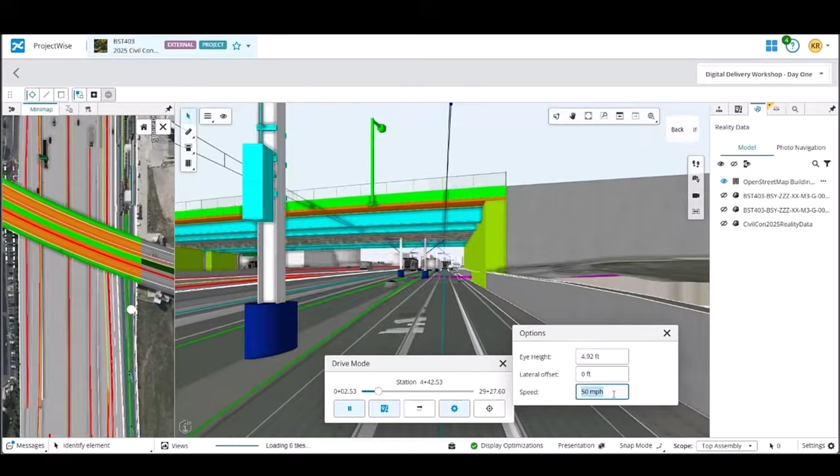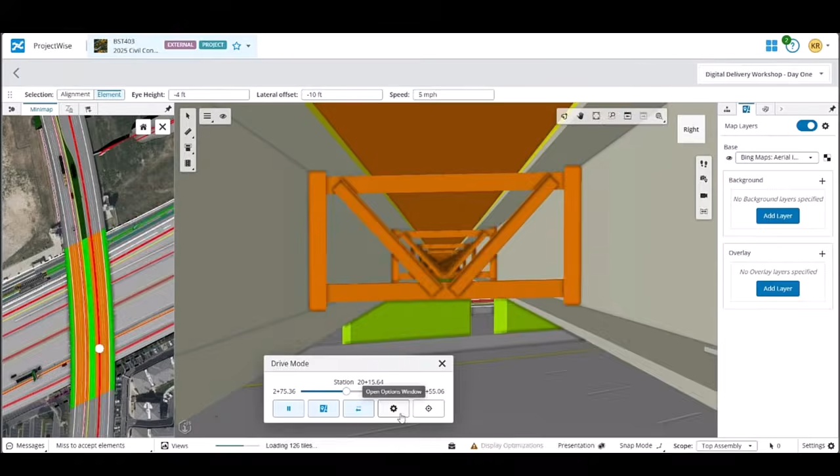So I want to give you just a little bit of a taste of that. This is a data set that was built here in Denver, right? So we're here in Denver, and what better place to be for a civil infrastructure conference? This is a city that's booming, it's growing. And so what you'll see here is they reconstructed essentially aspects of I-25, the Belleview rail station, and then Union Avenue. But look at the level of detail this model has. They put a lot of time into this, a lot of work into it for this workshop.

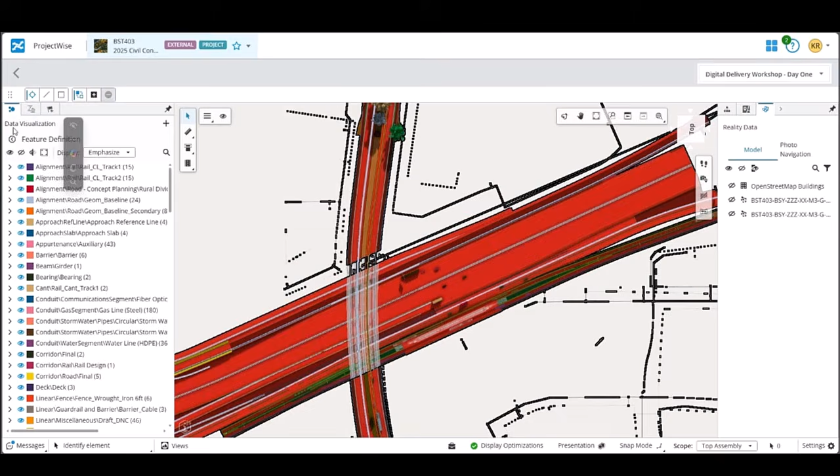So my name is Dustin Parkman, and over the last 20 plus years, I've done nothing but work in this industry across design, build, operate, and maintenance. And I've never been more excited about where the industry is than right now. We're finally starting to see this convergence of not only the market conditions, but also the technology coming together, allowing us to kind of do the things that we've been talking about for, it seems like, over a decade, which is sharing information, integrating data, and being able to leverage the great work and artifacts that you guys do every day throughout the life cycle of infrastructure.

So at Bentley, we refer to ourselves as the infrastructure engineering software company. It is all that we do. So there's no better place we'd rather be than right here with all of you for the next few days. When you think about civil infrastructure, we often think about it in terms of transportation, so roads and rail networks and a lot of the linear stuff that we specialize in. But the reality is what you do spans all of these different industries, and these are all the different industries that we participate in, particularly with civil infrastructure, across transportation, water, energy, mining, facilities, et cetera, et cetera. It all plays a vital role in what we do.

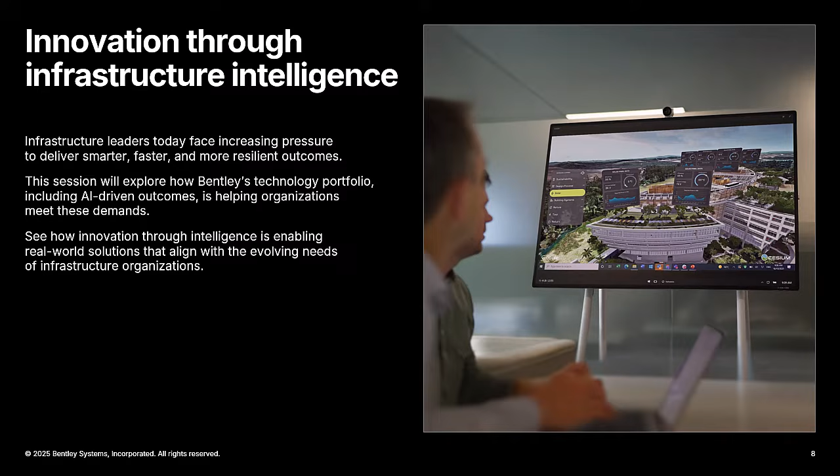So these are just some of the data sources, the usual suspects that you would find in any given project or any type of infrastructure organization, whether it's subsurface data, geospatial information, the wide array of design and simulation software that comes about, systems that are in the field for SCADA and IoT, as well as all the wide range of survey artifacts and enterprise data. But it's really hard to pull all this together and make it seamless and use the information across all these different stages.

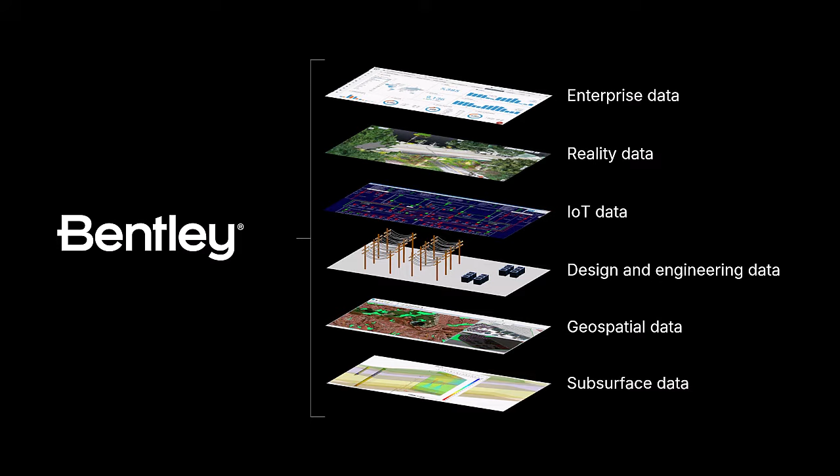So our approach to this problem is what we refer to as an infrastructure digital twin. The simple way to think of that is just a virtual replica of a physical thing. A lot of the work that people in this room do, you're creating those virtual representations of what's going to be built, what's going to be operated, what's going to be maintained. And so by leveraging that as a visual index to find information is really, really an important part of where the industry is going.

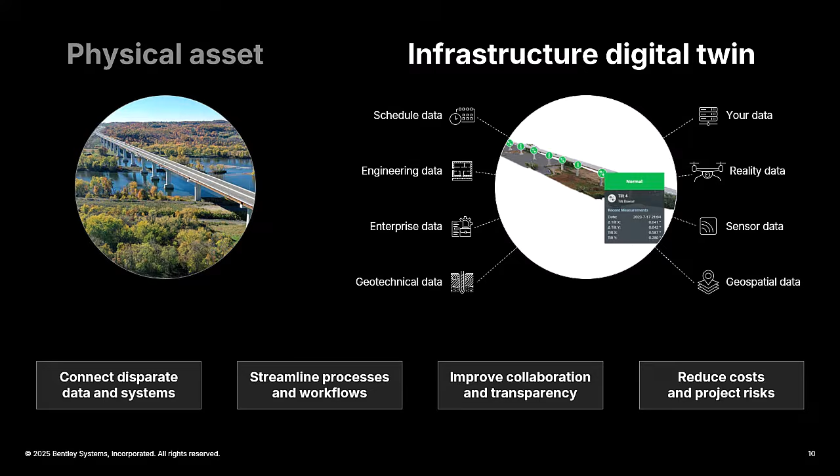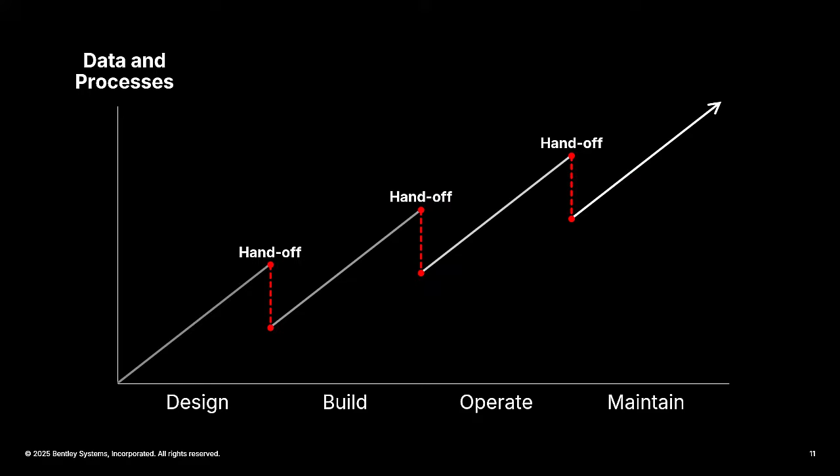Many of you have probably seen a diagram like this before, showing the information loss that takes place over design, build, operate, and maintain. There are these different stages where data is handed over, it's lost, and then you have to rebuild it. So what we're essentially trying to do is compress that.

We're not trying to solve it all, but we want the right information to be carried from design to build, to operate and maintain. For this room, what's really interesting is we're finally starting to see convergence where design and engineering data can be leveraged throughout all these stages. There are also commercial opportunities to leverage that intellectual property across the life cycle, allowing engineering firms and design agencies to create more value across the life cycle of infrastructure. I'm going to walk you through a simple example of that.

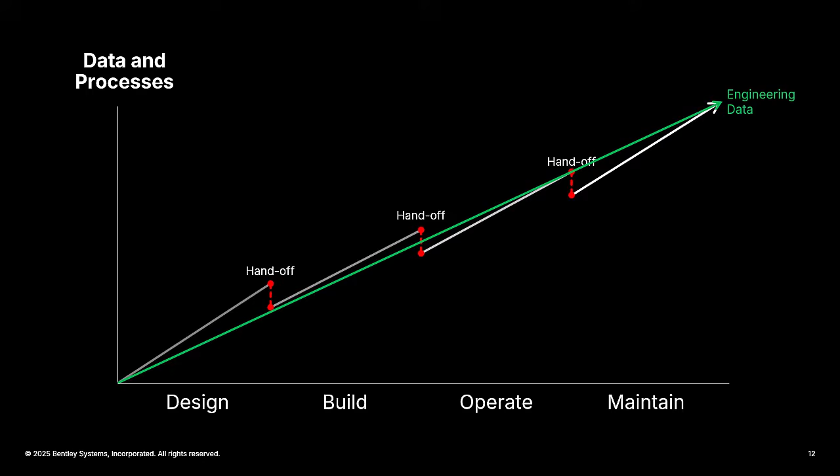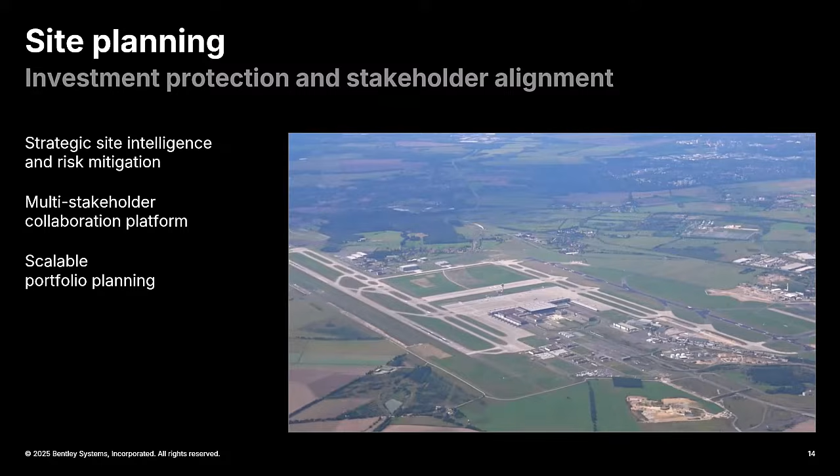From planning through design, through construction, and operation, what do we mean by leveraging a digital twin in the planning stage? At the beginning it could be about understanding the site conditions, maybe even site selection, if it was a new project.

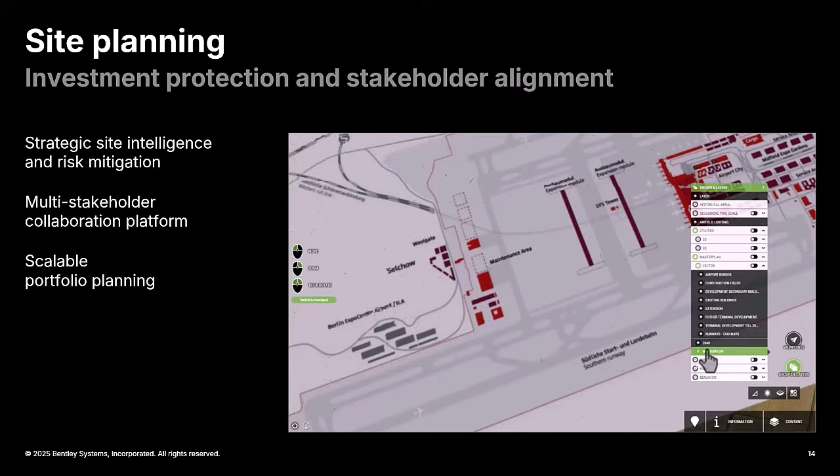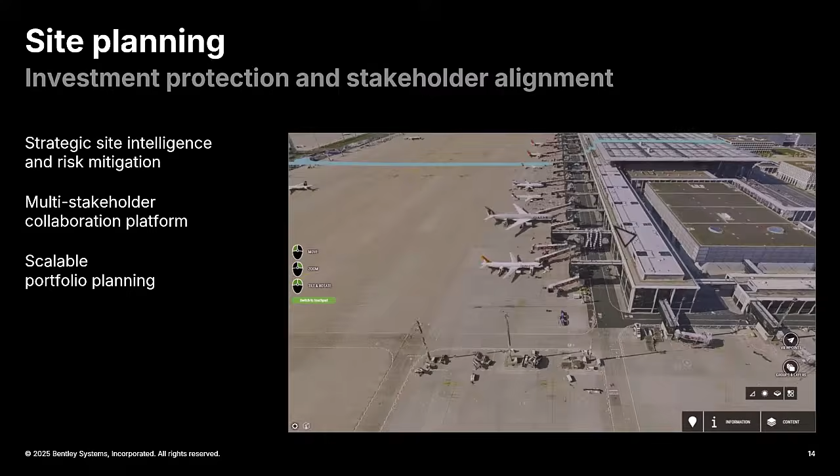In this case, I'm showing an existing airport facility, and we're starting to look at enhancing this airport, determining whether to build a new airport or expand the existing one. For the planners, this visual way of looking at the information is really powerful, not only to see the model, but to understand the utilities, the power, water conditions, and subsurface conditions, so you can get a true 360 picture of what you're getting yourself into from a capital allocation perspective.

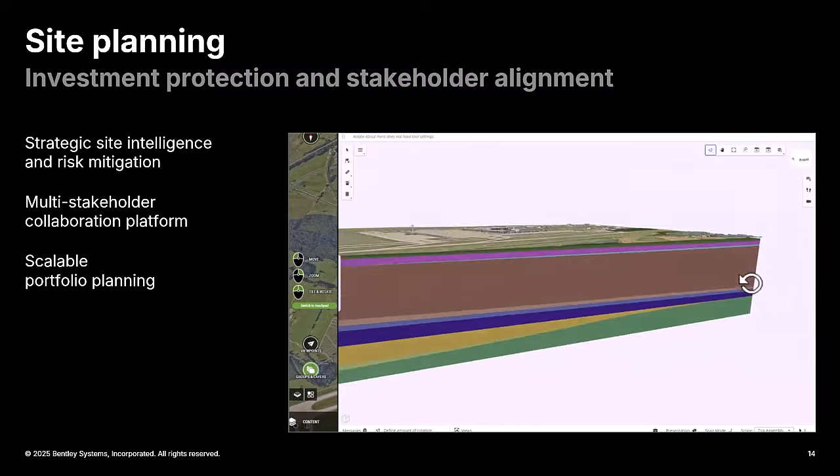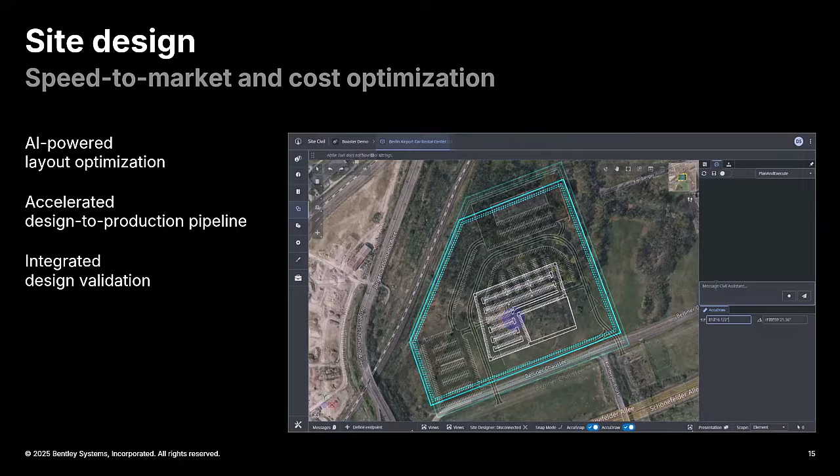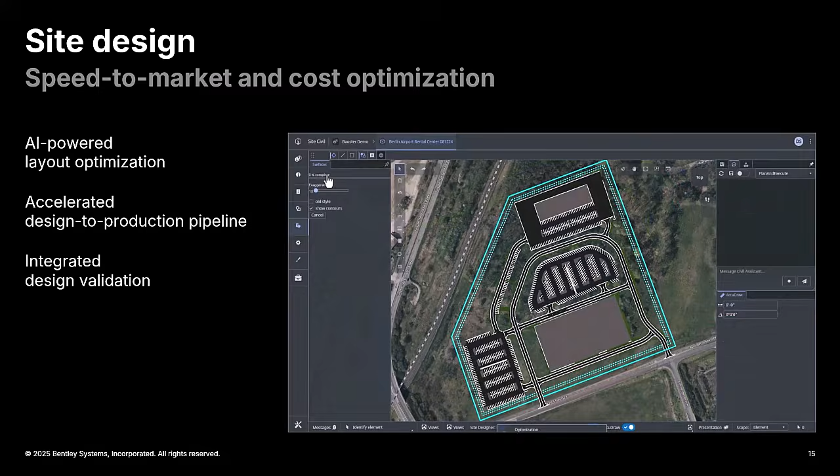Once you've figured out those options, you can explore them in conceptual or preliminary design. Here we're showing an example of leveraging AI to automate some of the sketching out of the conceptual design of a site. This gives you the ability to explore different design options, then bring those alternatives back into an environment where stakeholders who have to make decisions can interact with that information much more effectively.

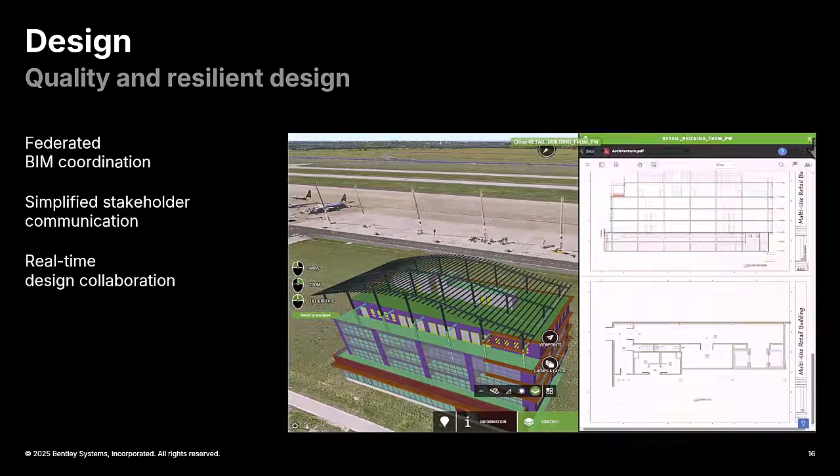Here we're looking at some office buildings on the site, along with terminal information that's going to be built for this particular airport. The digital twin allows you to interrogate that information and look at different conceptual options before you move into detailed design and before you move into construction.

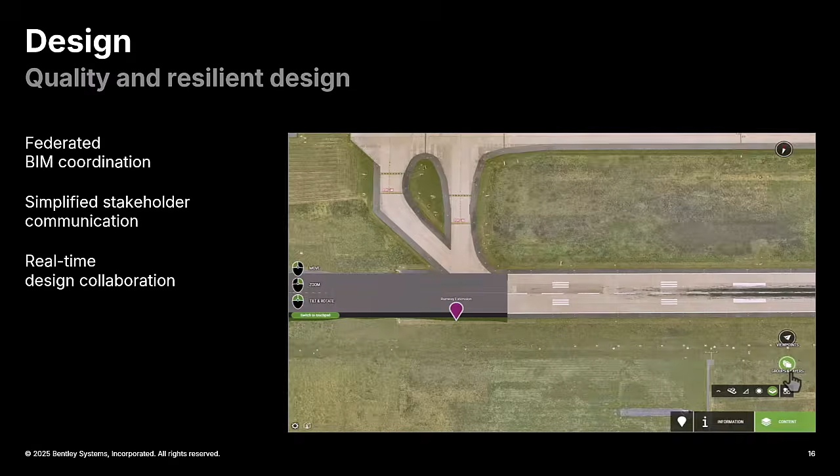Once you've made your site selection and done your detailed design, you want to simulate the construction of that piece of infrastructure. In this case, we have a facility we're constructing where we've taken the design and broken it down into its constructible parts using a schedule and a 4D model, then simulated how it's going to be built.

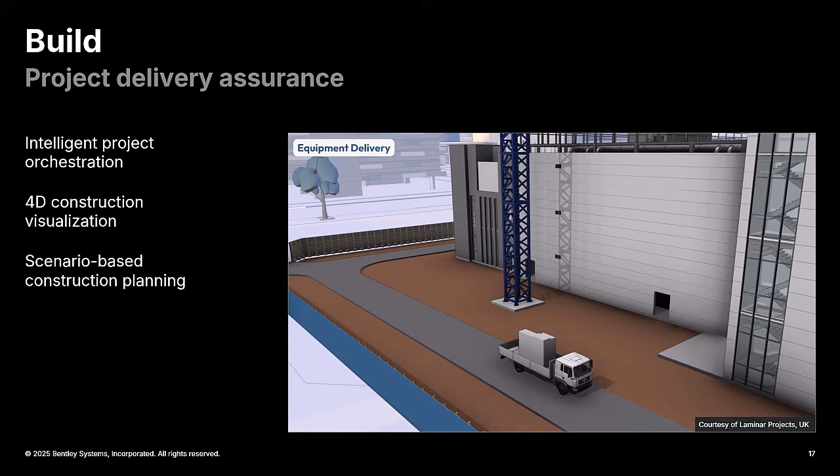This can be simulated at a conceptual level from a planning perspective, so you understand the risks, or it could be a detailed scenario where you're actually planning out the construction itself with a detailed work plan, P6 schedule, etc. This allows you to simulate the construction before it happens, understand your risks at much greater depth, and avoid construction liens and similar issues.

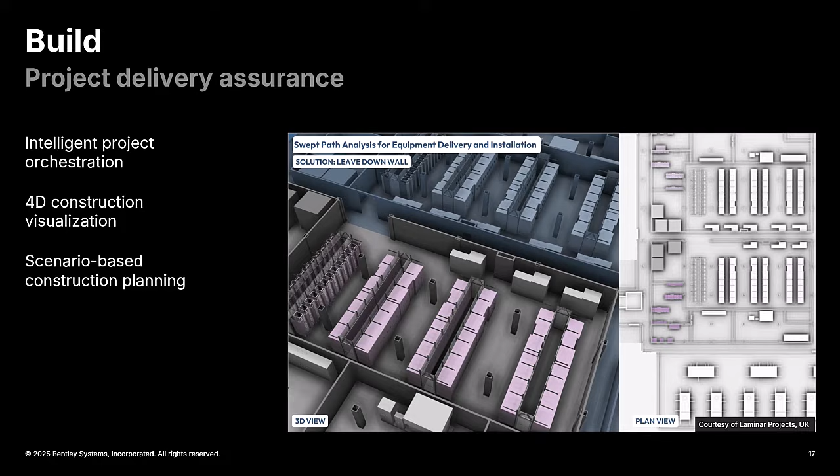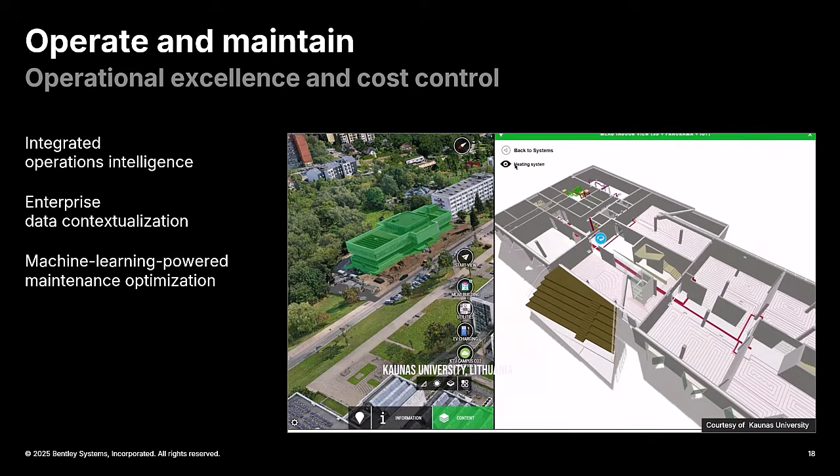But once it's built, you want to operate and maintain it. We're not saying a digital twin is how you would operate and maintain infrastructure—there are a lot of systems already in place that do that. But it is a very effective way to visualize the operations as well as the engineered data behind it, all in one single pane of glass.

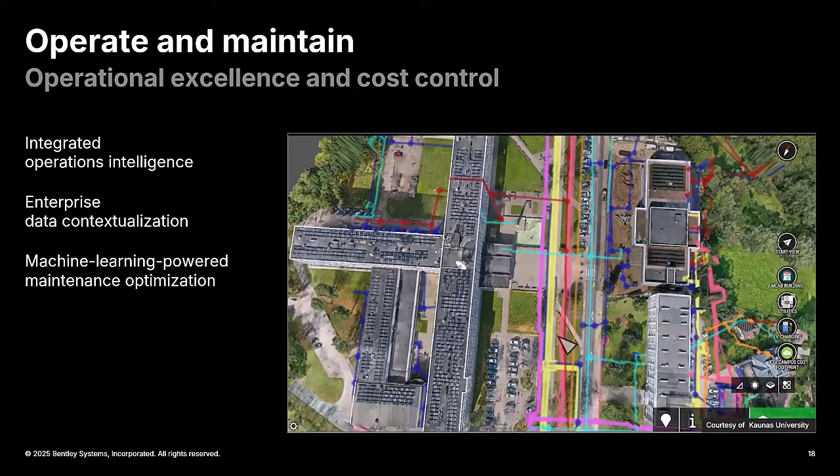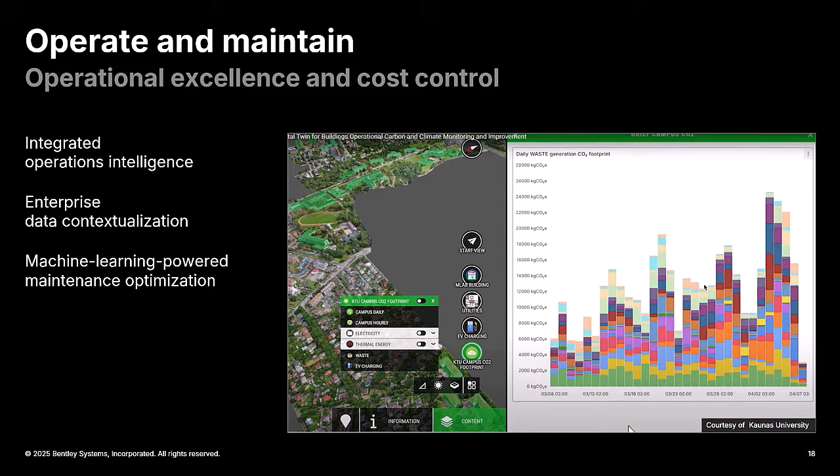Leveraging the digital twin in this respect allows you to take all those data points I was talking about earlier, put them into a visual index, and interact with that information from a planning perspective, from a maintenance perspective, et cetera. Across all of those different stages, the digital twin gives you this very rich visual environment for stakeholder engagement, for public engagement, for anyone who has a skin in the game for what's being built. They can interact with it in a very easy, game-like fashion.

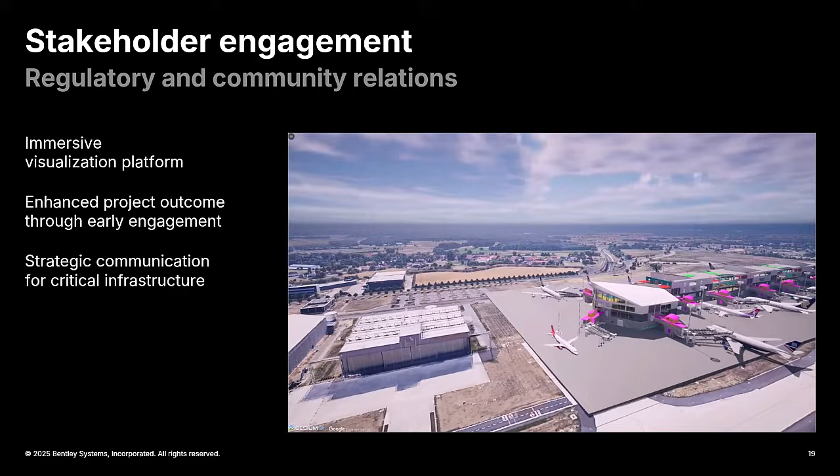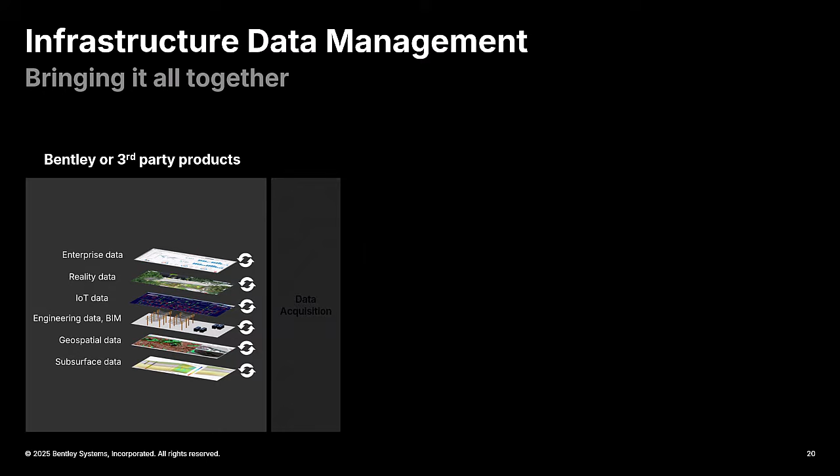If you look at this from a software architecture perspective, I'm not going to go into too much detail here, but essentially we assimilate all of this information, and behind all of this is our iTwin platform and our Bentley Infrastructure Cloud. That is what allows us to assimilate this data and provide applications that let you search for information, visualize it, analyze and predict what's happening with infrastructure, and interact with it in a lot of different modalities, whether it's the web, desktop, mobile, or virtual reality.

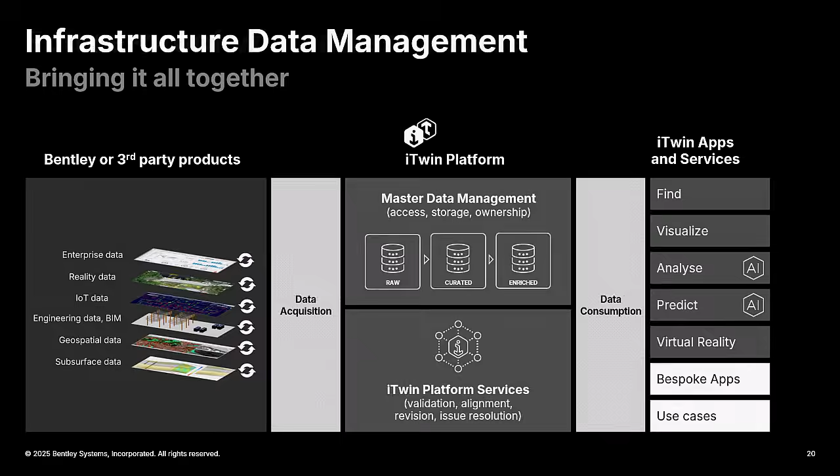So we take that approach to leverage that across all of our key product lines. At the core, it's the iTwin platform and our new Cesium platform, which are being converged together. That shows up in our Bentley Open Applications, as well as Bentley Infrastructure Cloud, and from an operations perspective, our asset analytics portfolio. So I'm just going to touch on a couple of key elements of what we're doing to make all of this possible.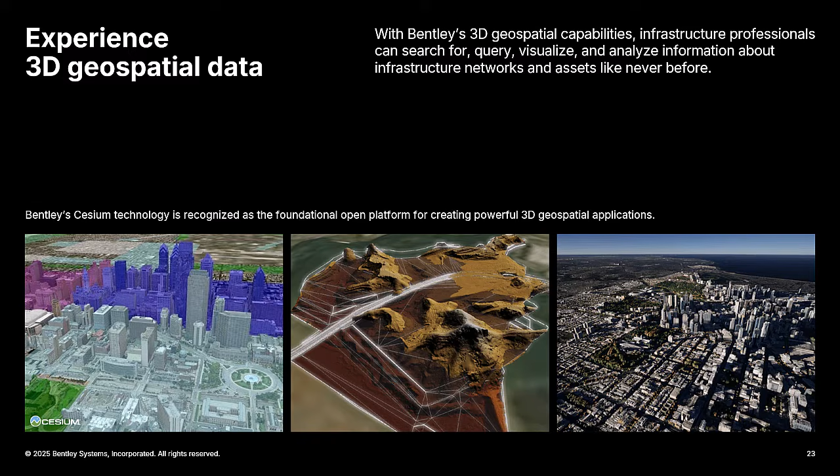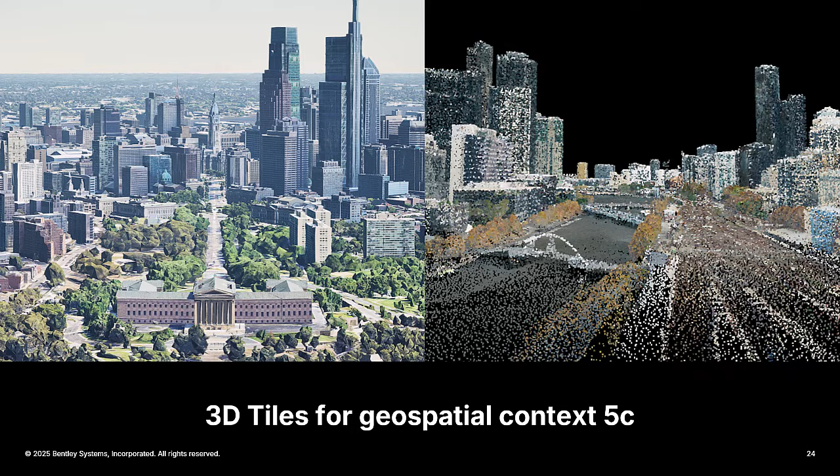Cesium is essentially a geospatial 3D tiling system. It's best of breed, allowing you to deal with 3D geospatial information at city and national scale. So you have 3D tiles for geospatial data, including LiDAR, reality meshes, et cetera. There's a wide range of different data sources, including Google's 3D tiles that we also pipe in, as well as 3D tiles for BIM and CAD data, basically taking vector-based graphics and converting that into 3D tiles.

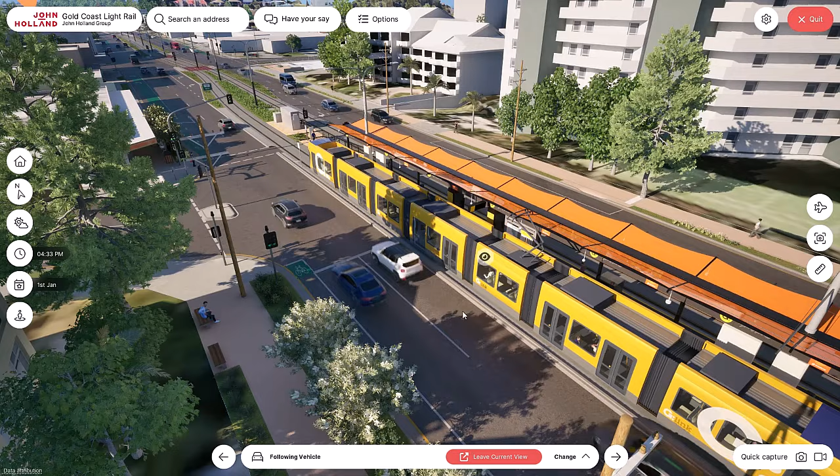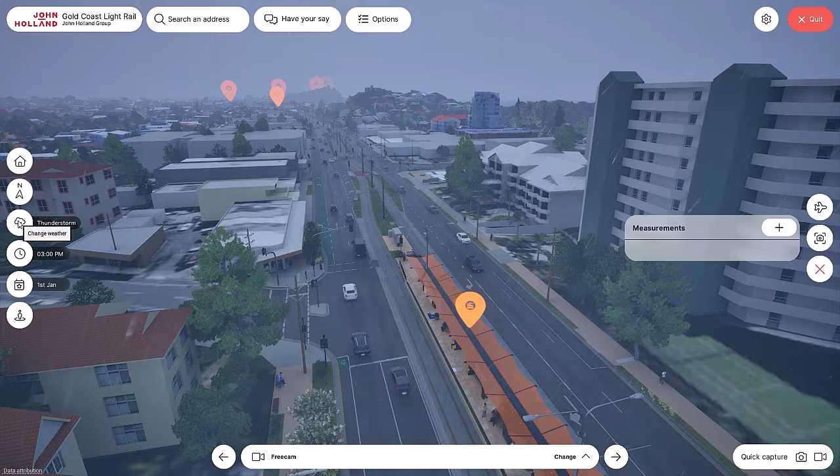Here's a prime example: John Holland, a project in Gold Coast, Australia. What they've done is take our iTwin platform and Cesium and build their own application, essentially their own digital twin system that pulls together all of their design models, with a custom user interface built on top to interact with that information. Here you can see all of your BIM information for the light rail, all the surrounding buildings, but you can also simulate traffic, understand weather conditions, and access other pieces of information. This has been a really powerful tool for their community in Gold Coast to understand the impact of the project itself.

Another example is Balfour Beatty VINCI. This is the HS2 project, or one of the HS2 projects, in the UK. This rail project is a prime example, particularly for long and skinny projects where you have a rail network spanning essentially an entire country. This gives you an environment to interact with it in a very visual, effective way.

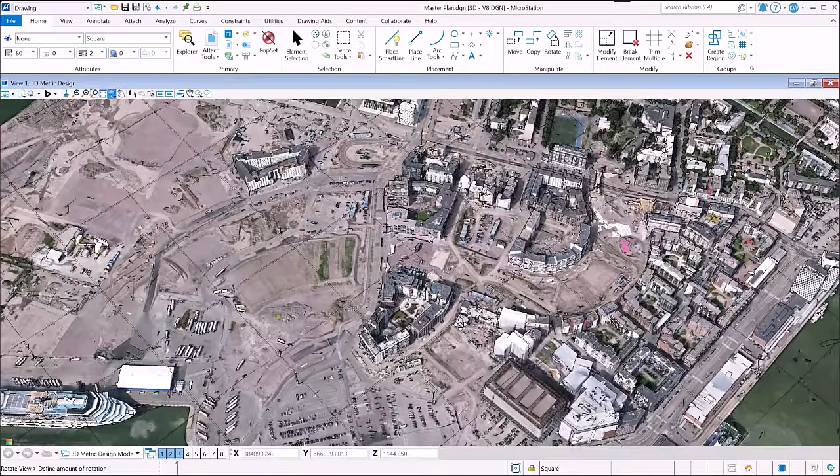A little closer to home, I'm going to show you what we're doing in MicroStation. This same engine is now embedded directly in MicroStation as well as our DGN-based applications. Here we're showcasing Cesium piping in 3D tiles directly from Google. You can bring that in to understand where your projects are going to take place, clip it, and get terrain information, et cetera, before you go about your project environment.

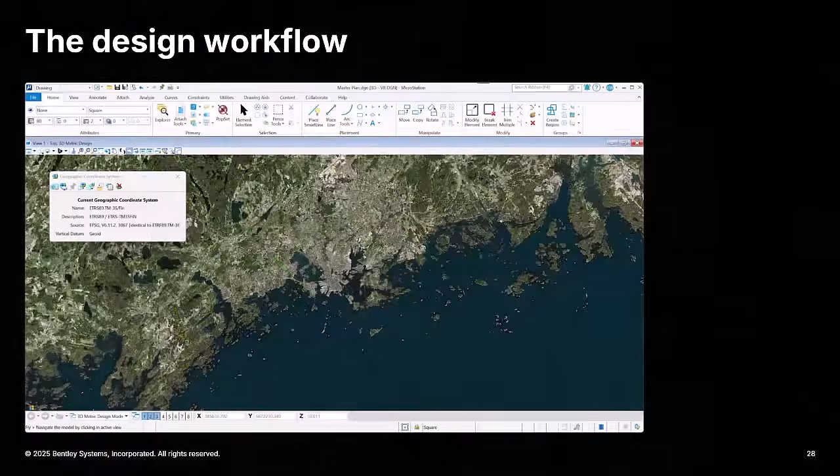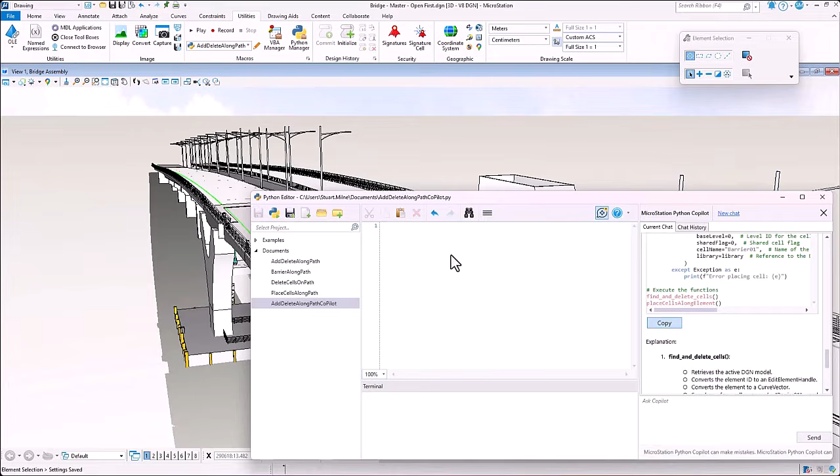I'd be remiss if I didn't talk a little bit about AI, and I'm not going to steal Barack's thunder, but we're doing a lot of different things in AI right now. This is just a practical example inside of MicroStation. We've added a new scripting engine inside of MicroStation for Python, and Python is dialed into large language models so you can use it to help prompt and build out parametric scripts. Here we told it we want to build a parametric script to build a Jersey barrier, and we're going to build it based off of this line here.

So basically we select the line, we can play it, but the AI wrote the script for it. All we had to do was say, hey, we have this type of section, we want to reproduce those many sections around as long as this particular line is. And if you move the line, it starts to react to it. Just a simple example of leveraging AI pragmatically to do parametric modeling inside MicroStation, and these tools will be available in the other DGN applications.

So without further ado, I'm going to hand it over to Burak to talk about what else we're doing with regards to AI.

Thank you, Dustin. Good morning. Well, it's an amazing crowd I see here. Thank you very much for being with us. My name is Burak Boyacı. I'm a bridge engineer by trade, and I've been with Bentley since 2017. Now I'm responsible for products like Open Roads, Open Rail, Open Bridge, and Open Tunnel. Today we're going to talk about how Bentley approaches AI and how it can help with the workforce shortage. Let's get started.

Throughout history, since the beginning of it, humankind looks for ways to make things more efficient, do more with less. In ancient times, Egyptians invented this machine to be able to lift huge stone blocks to build pyramids, to save some muscle power. And then we invented windmills and water mills for the same logic. We wanted to replace some muscle power. That was very much needed at that time.

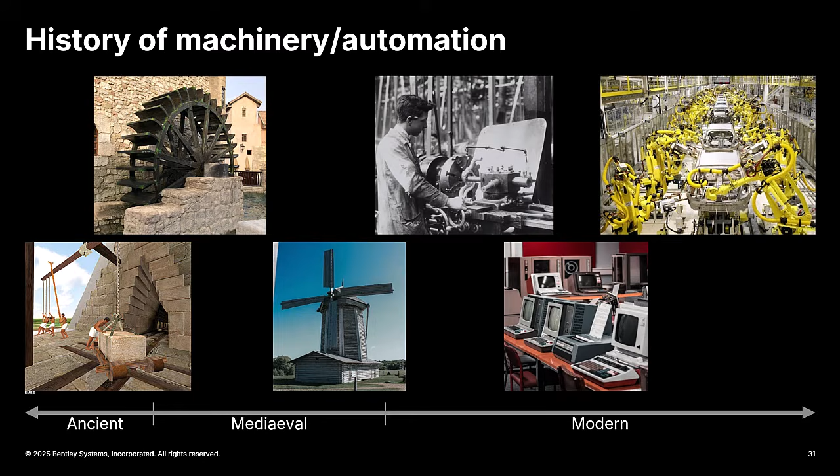So, considering all the challenges humankind is being faced with today, what do you think is the next thing? Could it be AI?

So that said, AI is not the first revolution our industry is facing, right? We did this many times in the last four or five decades. We started with the desktop and then moved to the cloud. Now almost everything is on the cloud right now. The way we convey the design intent has changed.

We started with plans, just a piece of paper and lines, no intelligence, no data in it. And then we moved to models and then databases because we realized that data is the most important deliverable for the downstream operations. Later on, we said, okay, we started with CAD, and then we said, we can do better. What if we have a 3D representation of the asset and then assign data to it?

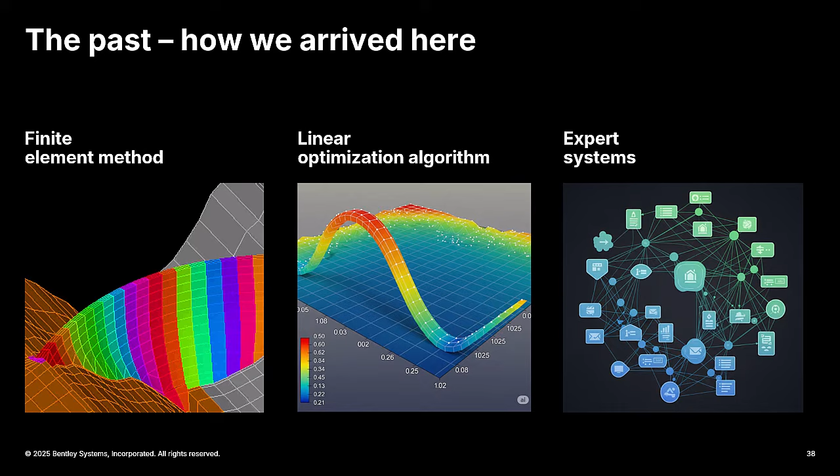If you look at today, where we are with AI, we already do great stuff. We evaluate site conditions. We can detect cracks with photogrammetry, or faults, or the condition of a bridge with AI algorithms. We can place a camera on the dashboard of a truck and identify the highway inventory and find defects. Also, there are a lot of projects in brownfield today - it's a very difficult job to go back to all the historical specs and documents and evaluate what has been done, what the intent was in the original project for maybe a 100-year-old highway or bridge. So AI can summarize those insights for you within minutes.

Now, the most exciting part, generative design. We already started to automate a lot of repetitive and mundane tasks with generative AI - writing specs, drawing production, etc. And not only that, but AI can also train an entry-level engineer, not only from the engineering perspective, but also how to use a software the best.

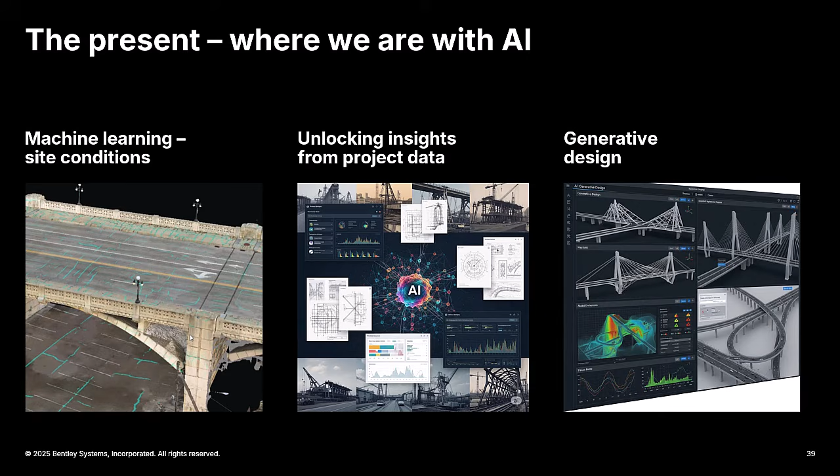We've said that AI is at an inflection point, and we are hopeful that it's going to find solutions to the biggest challenges that humankind is facing today, such as climate change or health-related issues. And we believe that AI for infrastructure is not an exception to this.

On the other hand, we realize and acknowledge that there are risks and concerns. For example, some of our users tell us, I don't know how my data is going to be used. I don't know if I'm going to lose control of my data. I don't know if I provide my data, am I going to lose my competitive advantage to others? Very valid concerns, and we'll get into those.

First of all, generative AI for infrastructure, we approach it from three perspectives. We think in Bentley that you can certainly get started with much better design alternatives very early on in the project. And seeing this very early on can lead to a more resilient and sustainable option from the beginning. It can also provide you better forecasts for cost or project overrun.

And then you can reduce the risk accordingly. Also, it can automate deliverables, drawing production, plan creation, and it can do it in a standard way with higher quality, as long as you teach it how to do it, right? And then it gives you more time to focus on more challenging things.

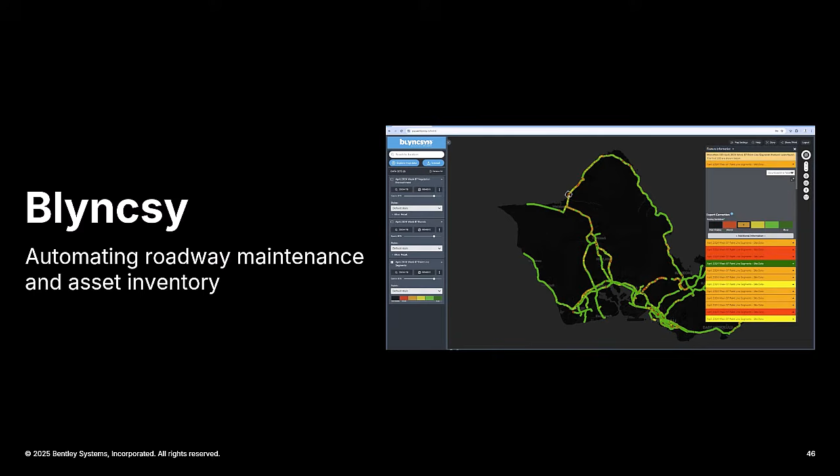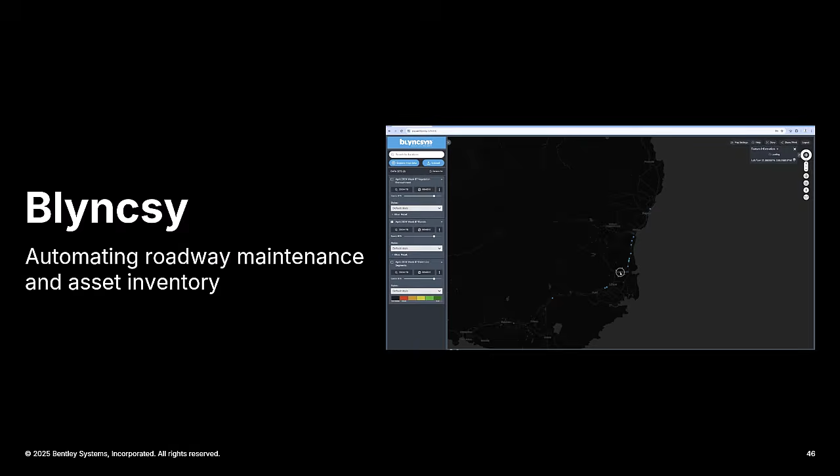So that's the first step. The second step is using AI algorithms - it can actually find the defects. Could be a broken guardrail, could be a malfunctioning traffic signal, you name it. By doing so, we believe that inspection time is going to be reduced by 90%. Therefore, owner-operators are not going to spend their valuable time finding issues and deploying crew on the ground. They can spend their time fixing these issues.

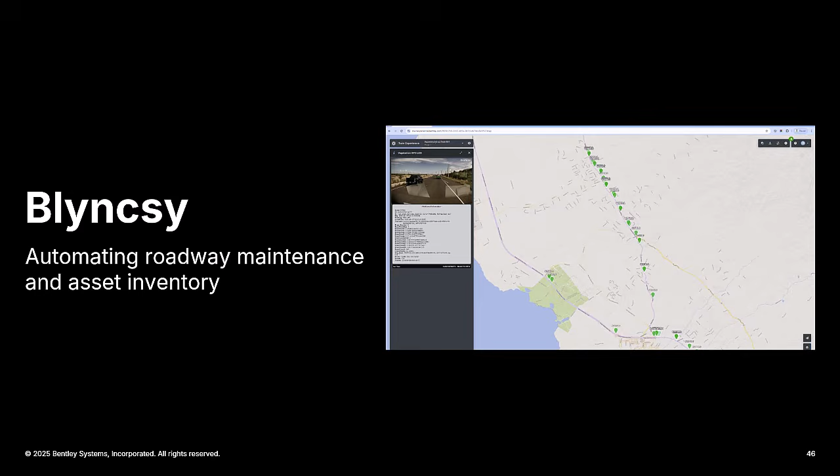Similarly, bridge inspections are crucial for public safety. We have had some unfortunate events recently.

Bridge inspections can happen every 2 years for certain bridges, or 1 year or 6 months, depending on the condition of the bridge and criticality of it. But bridge inspections are dangerous, dangerous for the inspectors and dangerous for the public safety. They're also very expensive, and not always very accurate because you can't get closer to where you want to be, and then you have to ballpark certain measurements.

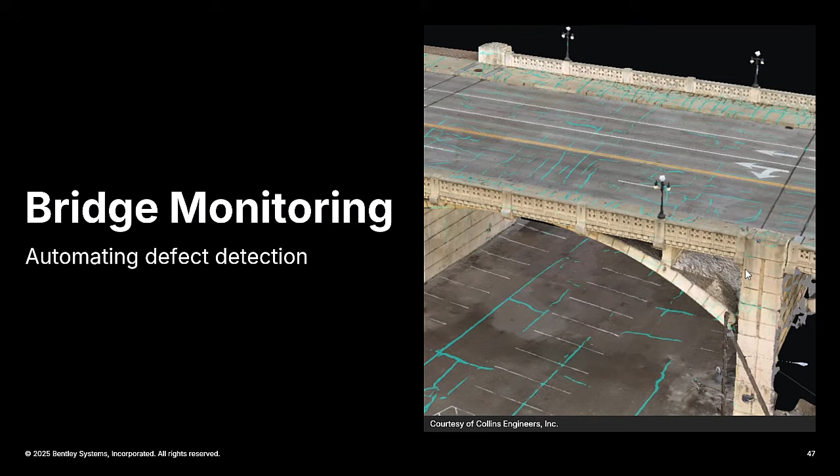With iTwin experience, using photogrammetry techniques and machine learning algorithms, you can actually detect all these deficiencies, could be cracks, potholes, spalls, rusted or exposed rebar. Then you can still deploy a crew to the field, but not to inspect the whole bridge. You can pinpoint, go to that girder 2 feet away from the abutment, and check that spot if needed.

Now, switching to the design side of the life cycle, OpenSite Plus is the first iTwin native design application Bentley created. We talked to many site design firms. It's not an exception in terms of workforce shortage. They are not able to find skillful site design engineers, but the work keeps coming, so either their backlog keeps increasing, or they have to reject work. Therefore, we've created OpenSite Plus to utilize Copilot Design Assistant, site layout optimization, and automated drawing production to increase the efficiency and productivity of the site designer, so they don't have to keep growing the backlog. Let's take a look at one example here.

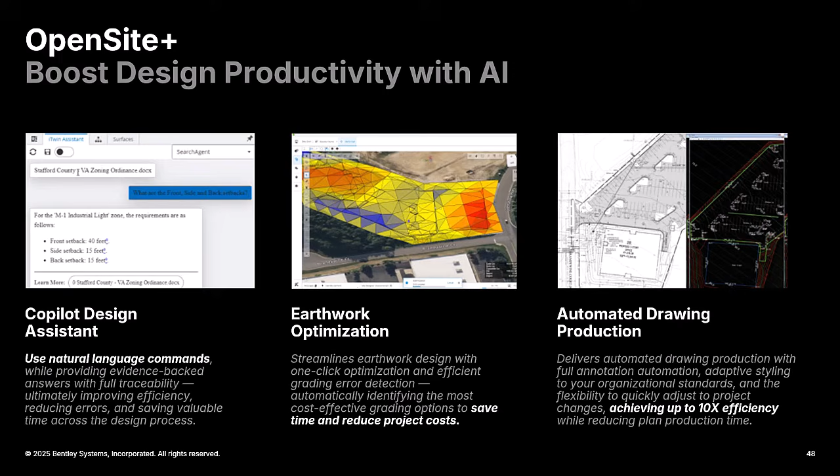We are going to build a hotel next to a new airport. In OpenSite Plus, an iTwin native application, you can get the project started very quickly and pull in relevant information for terrain, parcel information, or CAD data for roadway design from multiple resources, maybe Cesium 3D tiles, Google Maps, Azure connection. So you can get the project started very quickly.

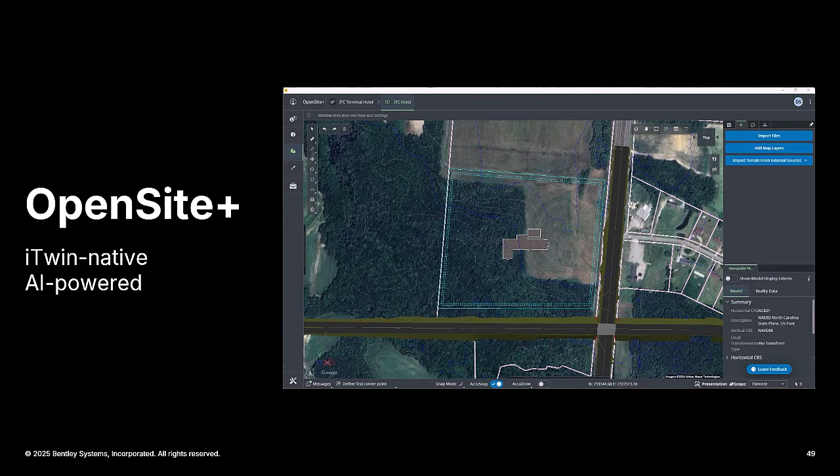The next step is getting the design started. In OpenSite Plus, we utilize AI Copilot Design Assistant. What it does is you can upload a document, could be a design spec or zoning requirement document, and then query and ask questions. In this case, we're asking, can I actually build a hotel in this zone? It finds the answer, says yes, and gives a reference for you to go back and check if it's correct. So good, we can design it.

Now we're adding some smart objects like roadway and parking lot. What I can do with Copilot is cross-check the model against the requirement documentation that I sent. I can ask, is the number of parking spaces I modeled here compliant with the document I uploaded? It says yes. All right, we're good.

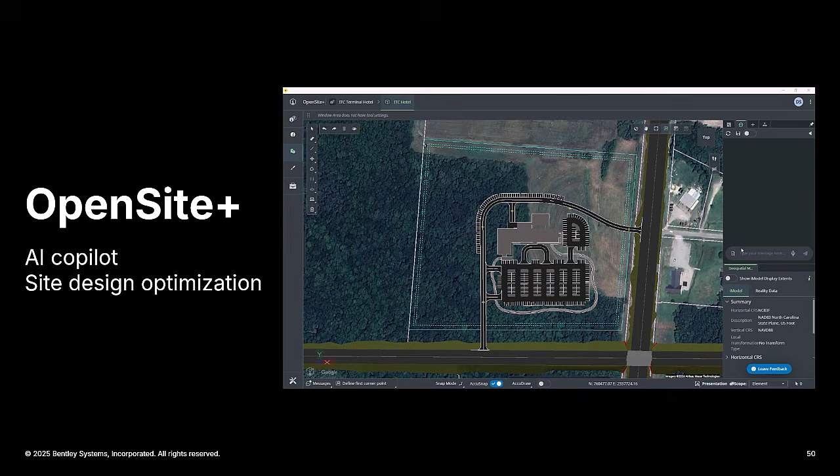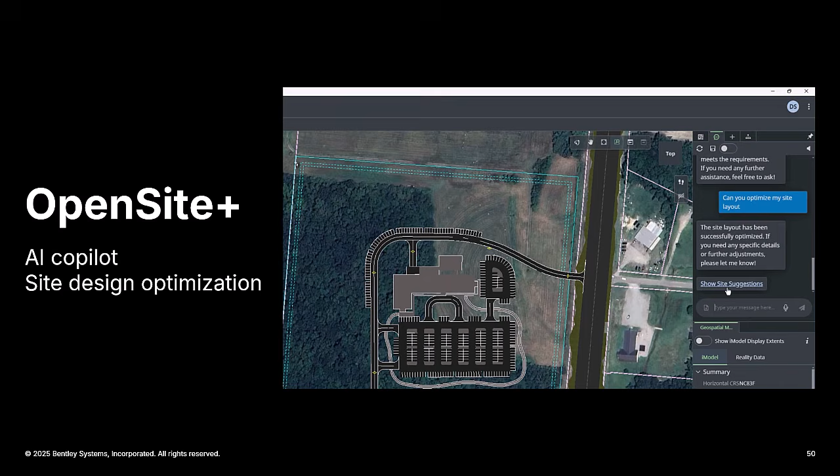Now the next step, because we just placed the hotel somewhere and parking lot somewhere else, I can ask Copilot, can you optimize my site layout? Give me the best options. It comes back with multiple alternatives with different dollar amounts attached. You pick one, the model gets updated accordingly, and then you move on.

You can also modify your model with natural language. You can ask Copilot to change the depth and length of a parking space and its orientation, and boom, it does it for you.

So just to summarize what Copilot can do today: one, it can check design requirements for you. Two, it can check design requirements against the model you created and tell you if you're compliant or not. Three, it can optimize the design layout you started with and give you options. Four, you can use your natural language to modify the model.

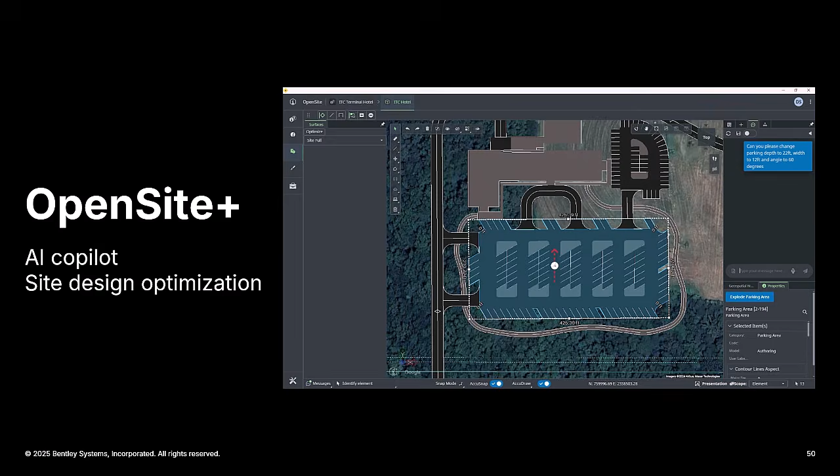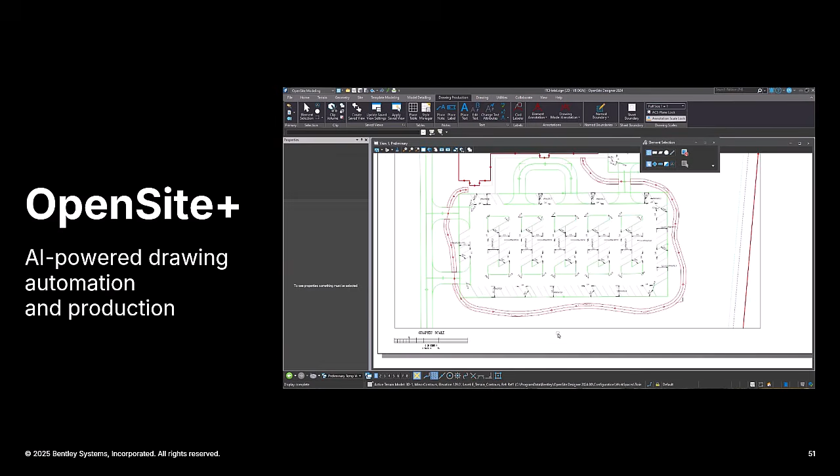Now, drawing automation. Again, we interviewed many site design firms and site engineers. They all told us they spend more than 50% of their time on drawing production. That's why we created this AI-powered drawing automation tool. You can easily cut sheets and create sheets, but also the AI agent can place labels and annotations automatically in the most aesthetically possible way, because it learned from hundreds or thousands of plan sheets provided before, so it knows where to place what.

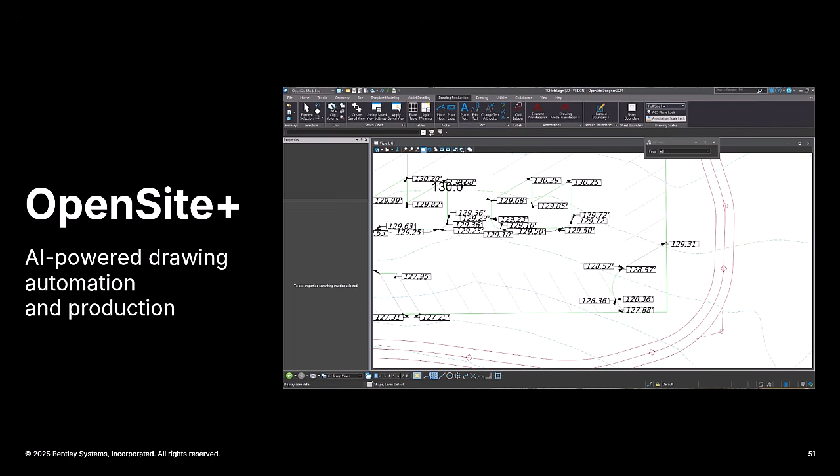We've been talking about OpenSite Plus, this exciting stuff, all the time. You're probably wondering, when am I going to see this in the mainstream products, OpenRoads, OpenRail, OpenBridge? I can tell you we're working very hard on getting these into the mainstream products too. In fact, you'll see some of it very soon. But I don't want to steal the show because the team is going to get into details later on in upcoming sessions and give some good news. By the way, I should include MicroStation into this as well, not only civil products.

My last announcement is about our major release timeline. As you know, we've been releasing in the Q3, Q4 timeframe typically. Starting 2026, we are changing this. MicroStation is going to release in Q1, and civil products are going to follow in early Q2, so that we are pulling ahead a little bit in the calendar year. That's it. Thank you very much for listening to me.